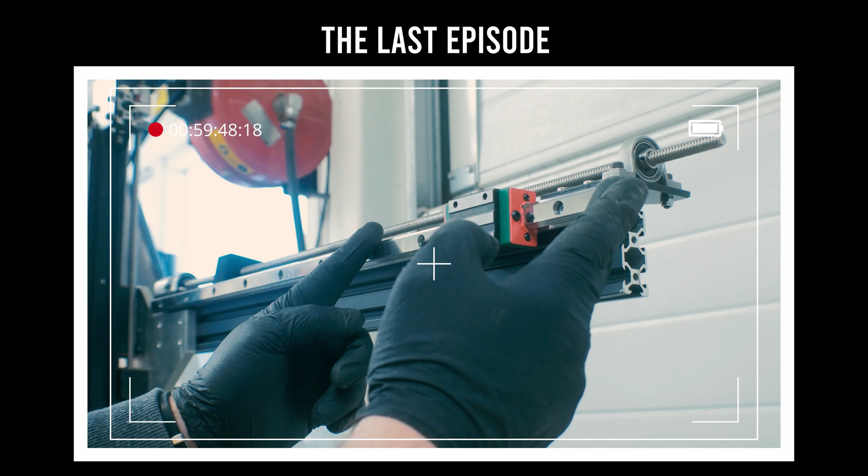I am going to use 4 of these HGR 15 rails, 200 millimeters long. Okay, go into the computer, find some of these on banggood.com, order them and get them here in the mail system. They will be here approximately.

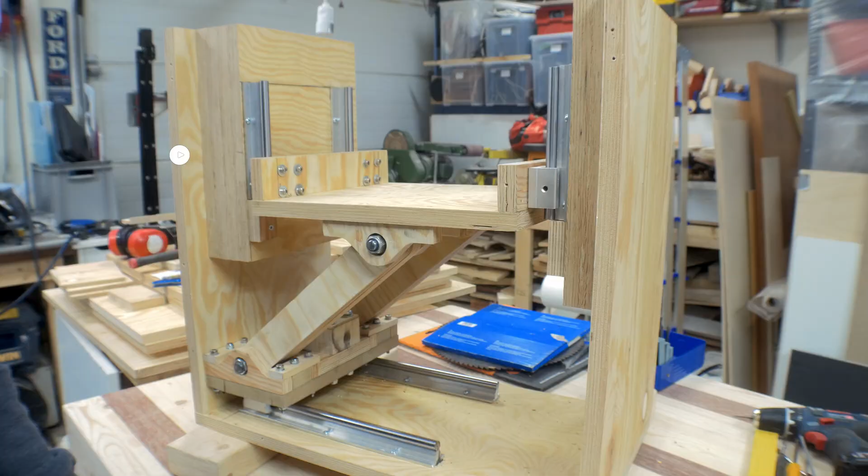Now that I have the new rails or linear bearings, I'm going to dismantle the motor carriage. I'm going to dismantle the old rails. I'm going to use 2 of the best blocks I have left over from this down here on this sled or carriage.

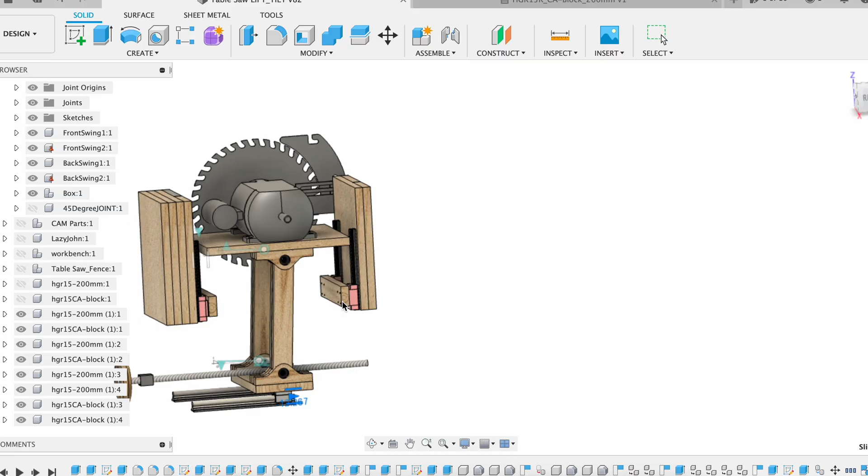As you can see here in the redesign in Fusion 360, I put the rails further down than I did with the old ones. This means that the attachment for the rail blocks is going to be underneath this plate where the motor is standing. This will give much better stability.

So the plan right now is to make this case a bit more stable. I'm going to put cross beams on each side here. This is going to give me much more stability in the sides. To place those beams, I need to be sure they don't come in conflict with anything else. So I'm just going to measure how high I can have the cross beams.

It's going to be attached in the middle here and be in the middle like so. So from the bottom I cannot be higher than 27 centimeters. This will give me the crossbeam approximately up here, so it won't come in conflict with this bolt when this is in the lowest position.

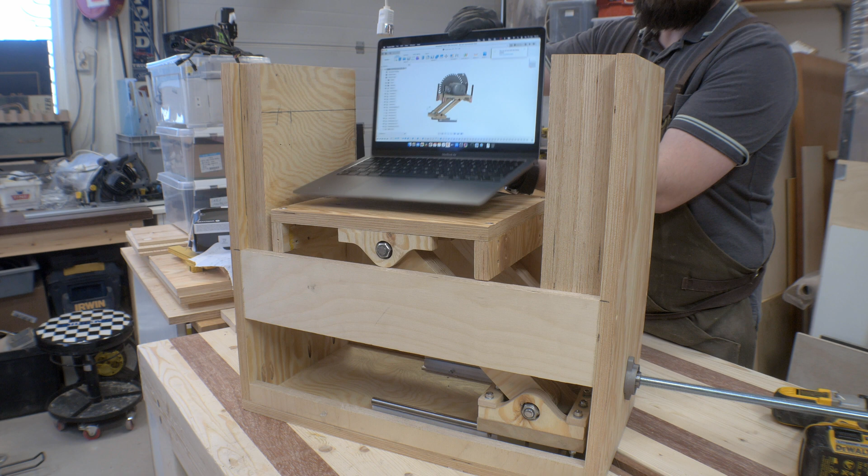Yeah, now that I put on these cross bracings, this case is much sturdier and it feels very solid. Now I have to figure out where to put these linear rails. And I want to do that by looking at the CAD drawing, so I can figure out what height I'm going to put them in.

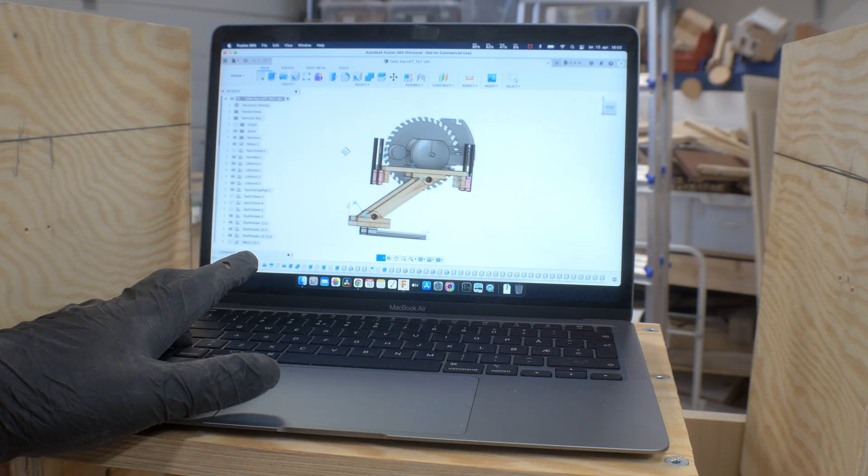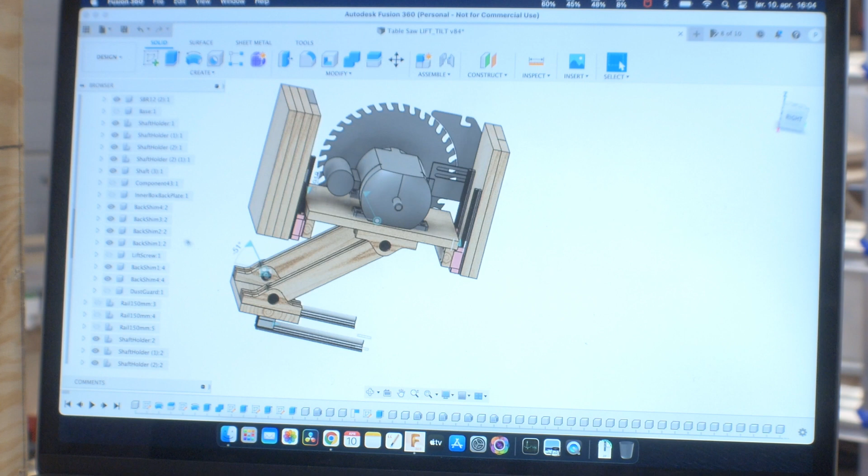So if we go into Fusion here, we can see that we have the linear rails here. This is the position in the lowest position. I haven't redone the CAD drawing down here. Now I have 2 of these blocks on each rail. If we put on all the other components, these shims, I don't need the lead screw yet, the back shims, and of course the back plate, like so.

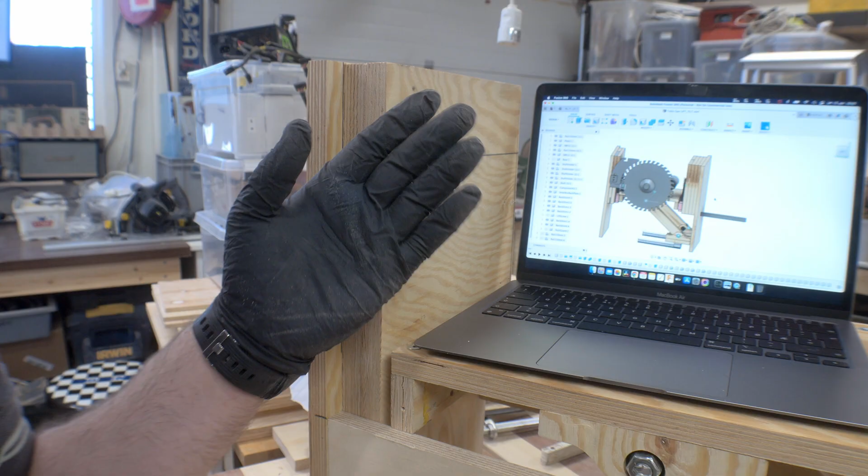So this is the way it's standing right now. If you take a look, I have 3 shims here and 2 shims here. And as you see, according to my CAD drawing, I want the rails to go flush down here. It's not completely flush on the CAD drawing, but this millimeter is not important in real life.

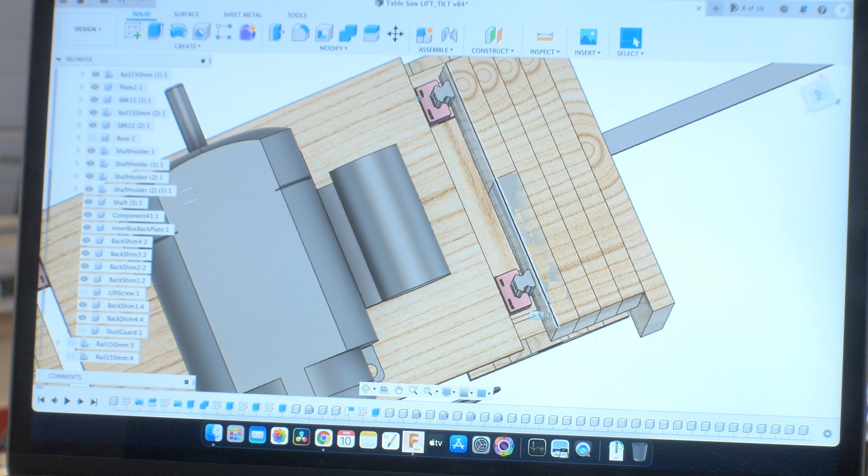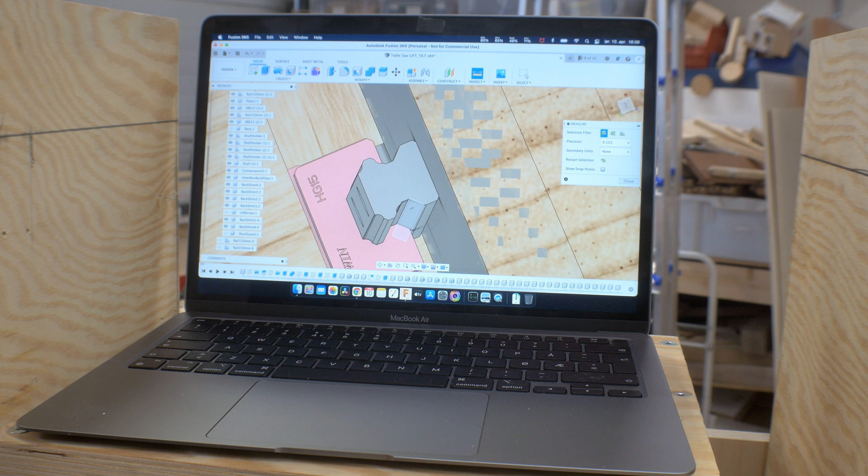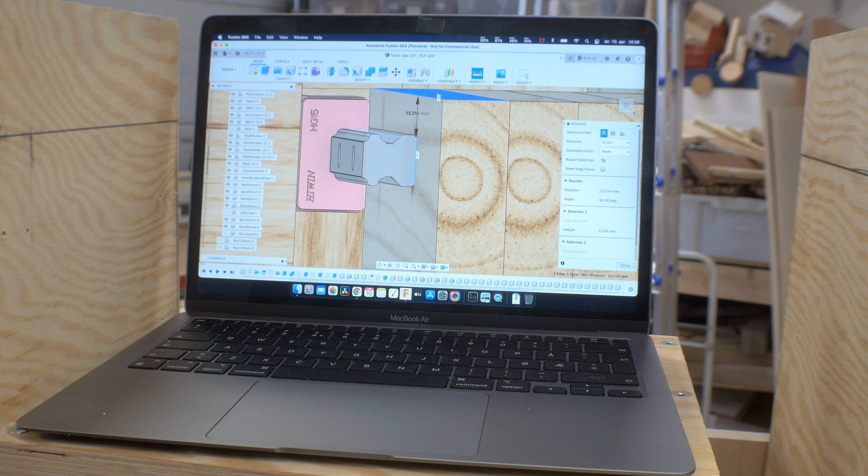And another measurement that is important is the distance from this rail to the outside of the shims on both sides. I can try to measure that by using the inspect tool. And by using the inspect tool, I see that I want it to have 42.5 millimeters from this edge. That's 4.25 centimeters. And if I do the same on the other side to that one, I want to have it 12.2 millimeters. That's 1.22 centimeters.

So the measurements that are important for me now are the measurements from the sides to the side of the rail on both sides, and that I want the rails to go flush down inside here.